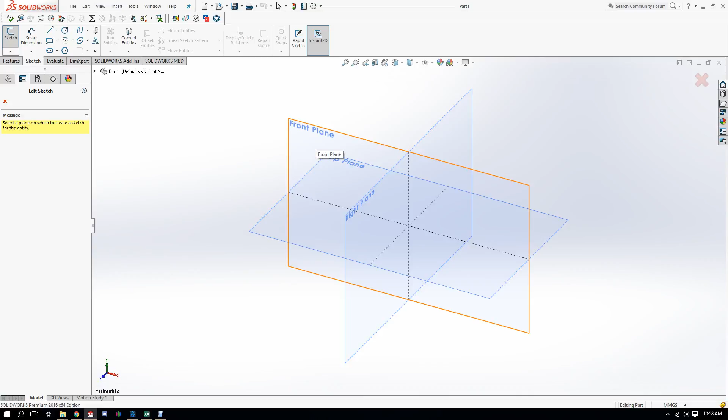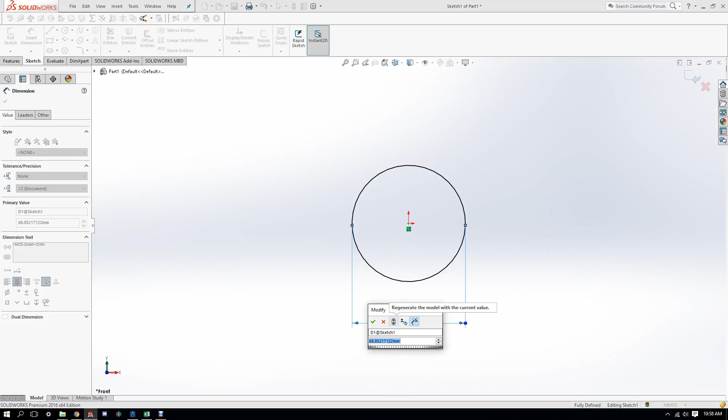We started with a two-dimensional sketch, starting at the origin. It makes a circle, right? It's just a two-dimensional circle. But I'm gonna make it a certain size. This circle is going to be 42 millimeters. So now I have a 42 millimeter circle.

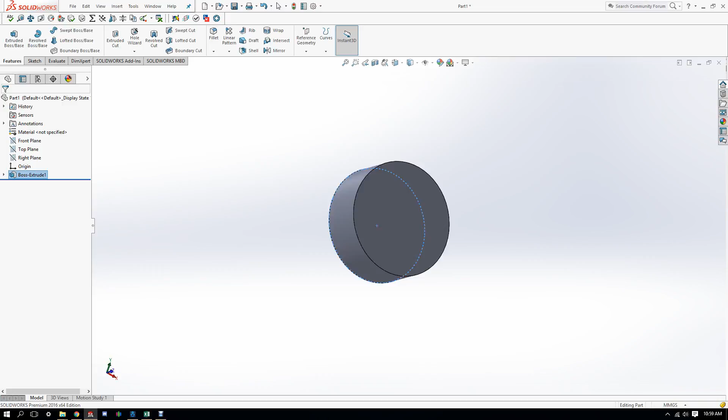But it's still two-dimensional, so I come over here and extrude it. I want it to be 17 millimeters deep. There. Now I have a cylinder boss.

I'm going to go over the back. I'm going to pick a surface to draw on, so to speak. And I make a center line that goes right through the middle. And then I'm going to create a little notch.

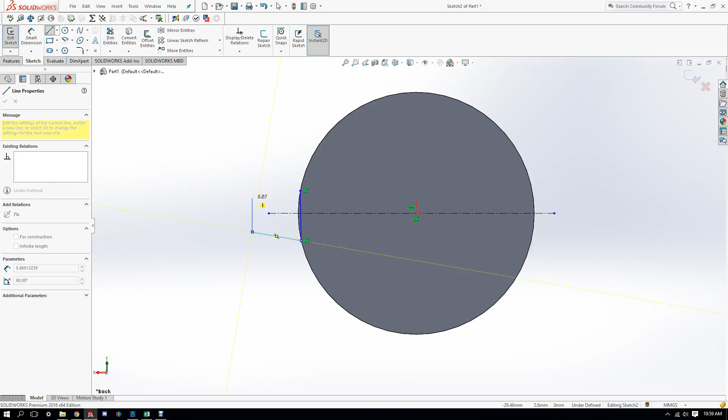Now I want this to be centered on the center line, so I'm going to put this line's center point and the center line that I created, and I'm going to tell it to be coincident. And then I'm going to tell these two lines to be at a certain angle.

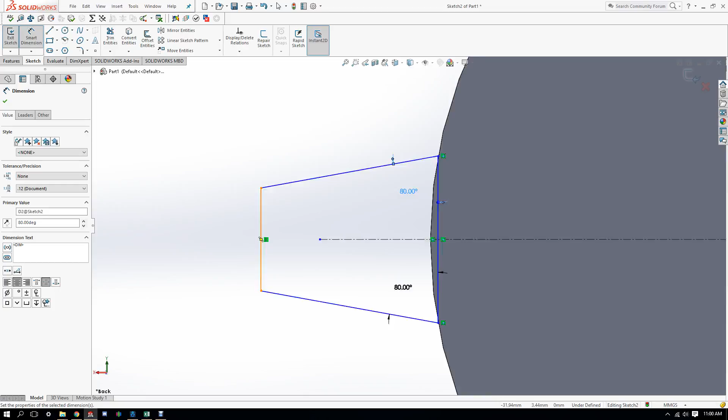80 degrees. And I'm going to probably make this line a little bit bigger.

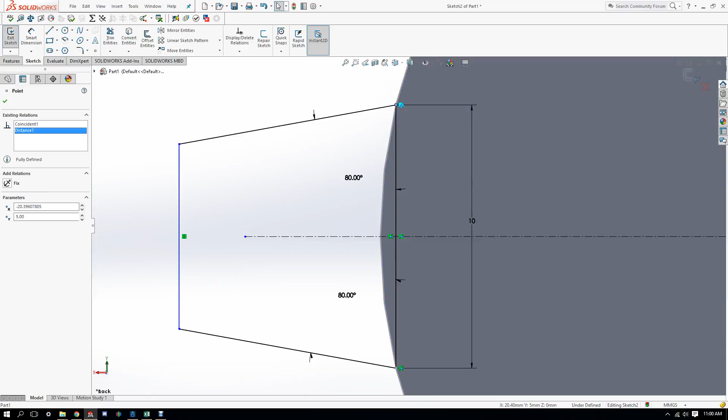When I created this line, I actually hugged the outline, so now this point right here is always going to be coincident with that, with the circumference of the circle. So no matter what I do to this line, it's going to be constrained, and always keep those 80 degrees.

These black lines mean that they've been defined by the sketch. So now I'm going to fillet it. 2mm fillet. Let's try 4 millimeters. There we go.

That's pretty good. Actually, I'm gonna... there we go. Now I'm gonna fillet.

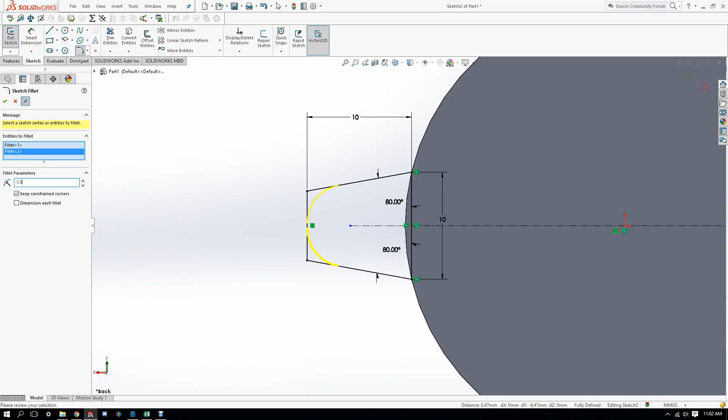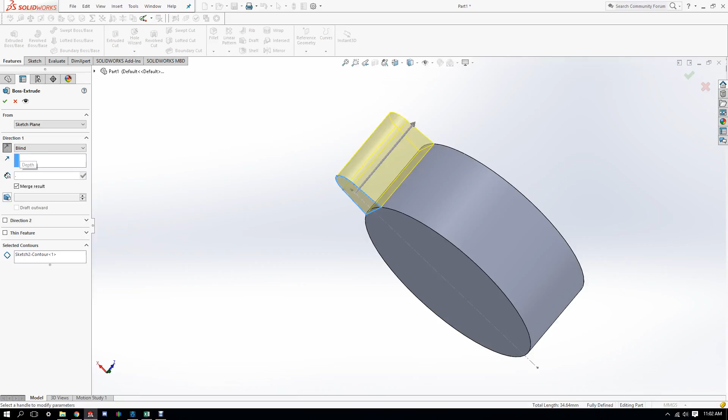There, so I have a new sketch there. I'm going to extrude that one as well, in the opposite direction. And then I'm just going to make that 5 millimeters... 0.85 millimeters.

Now I want this feature to be on the other side of the motor, so I'm just going to tell it to circular pattern, 180 degrees along this line.

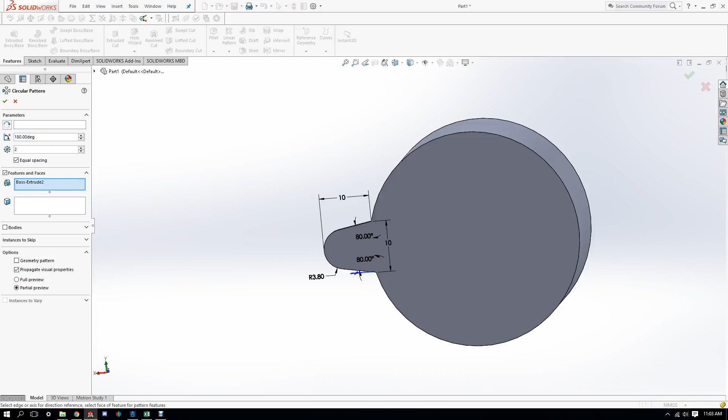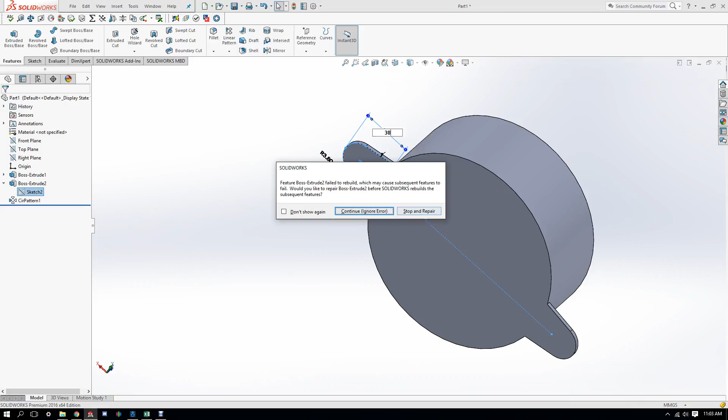There. Now, being parametric, we can change any of the parameters. It won't let me do that. Well, that's because I messed up the fillet.

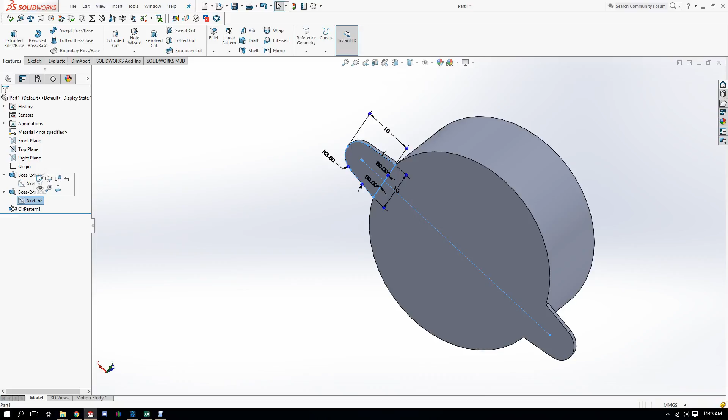You can change any parameter, and it's reflected in the final rebuild.

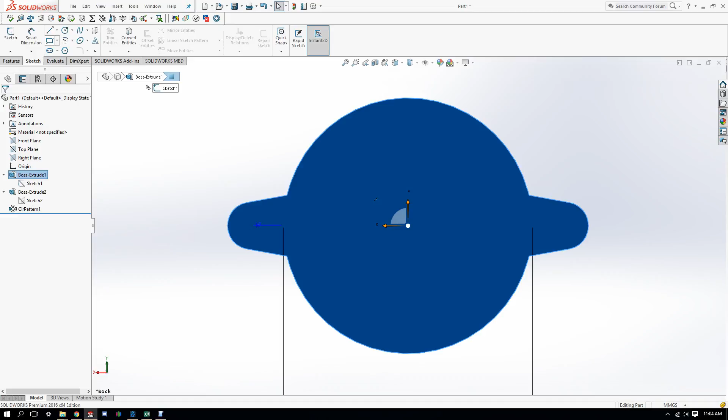Then I'm going to go back to the back. I'm going to make a new center line on this sketch, and I want this line to be centered against the origin. Get really close, so I choose the origin and the center of that line, and I tell it to be coincident.

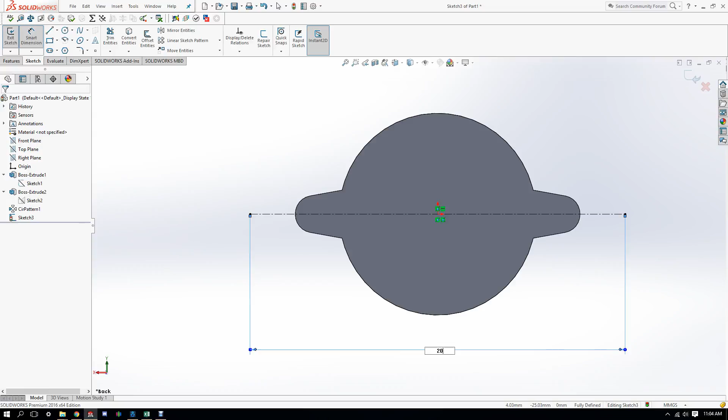Now, no matter how big that line, it could be 80 millimeters, or it could be 20, it's always going to be centered, because both the origin of that circle and the center line middle are

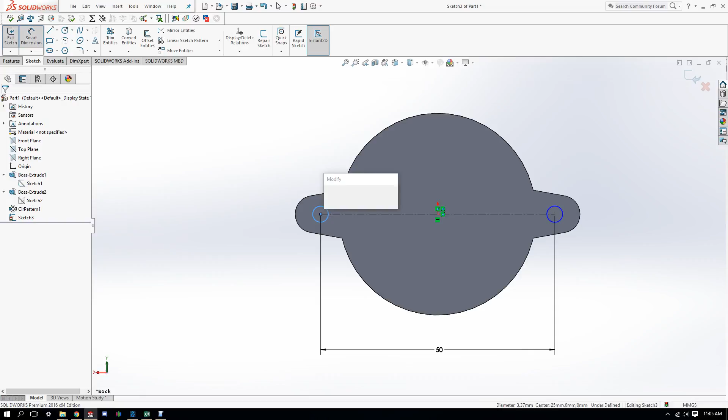coincident on each other. But I actually want these to be 50 millimeters apart, because I'm going to use them as a basis of two new sketches. I'm going to put M3 bolts through this, so I'm going to make smart dimensions. I'm going to dimension these circles to be 3 millimeters.

Again, they're just sketches on the surface, so now I can actually pick that sketch that I just made and cut it.

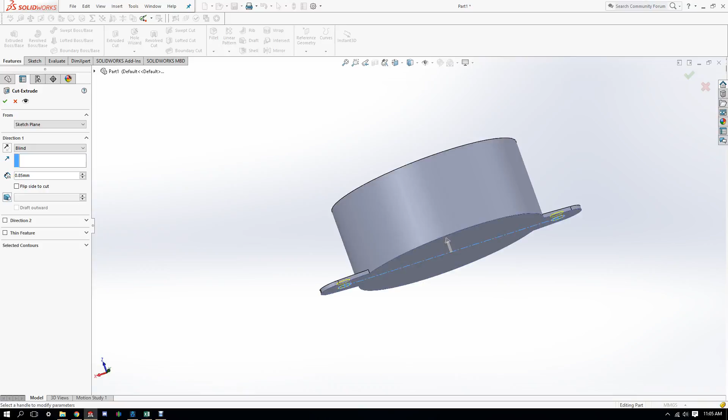And I can always go back here. Because that cut was only just as thick as this line, but I could tell that cut to go all the way, for example. Edit the feature. I can say I want it to be through all.

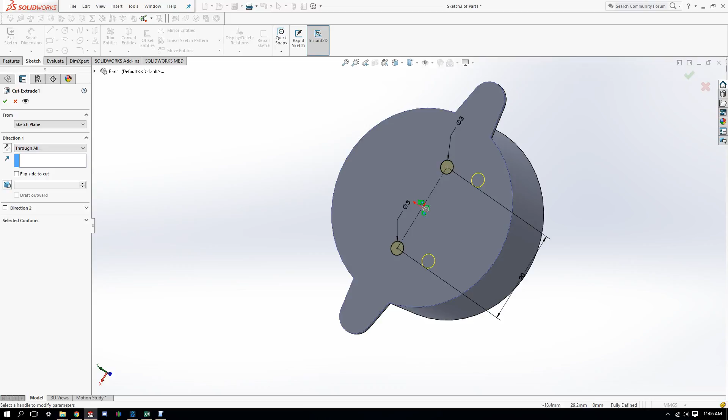But of course, that's not my design, so I'm going to come back here and make this 50. Excellent.

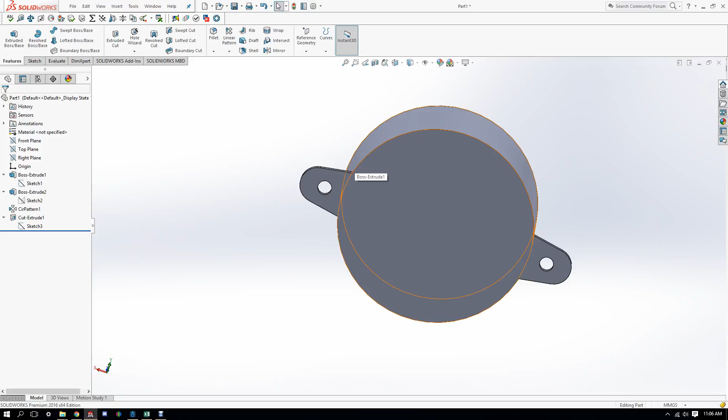I'm actually designing something that exists, because I'm making this motor part of an assembly for a bigger item that I'm making. So I'm going to go back to my

ISO view. Coming to the circle, I'm going to make a new sketch, new center line, starting in the origin. Just make a sketch. I want this to be 10 millimeters from the center.

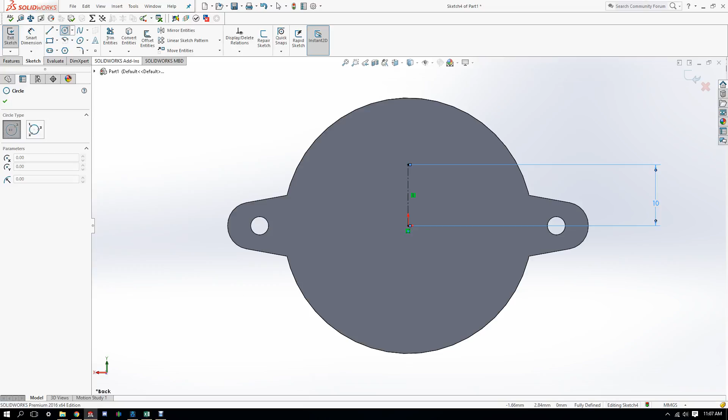And then I'm going to make a new sketch right here. I want to extrude that by, what was it? That should be 0.85 millimeters.

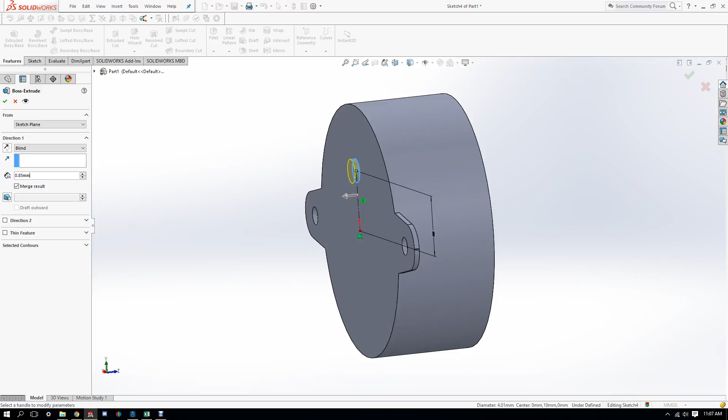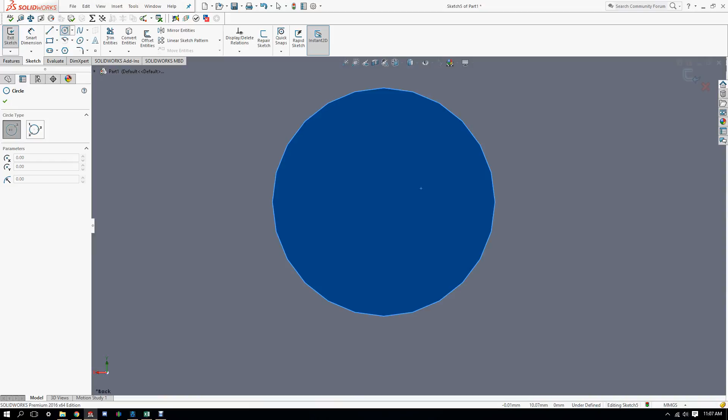And then this one, I'm going to make a new extrusion. Just make that 4 millimeters. Actually, that's incorrect.

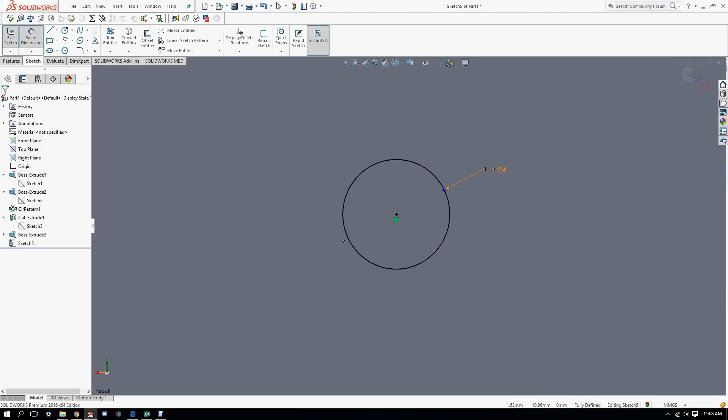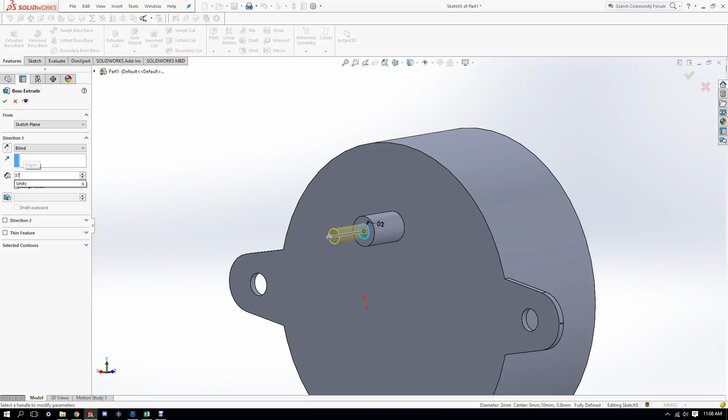There, you have my motor that I'm ready to make into an assembly with my gear. So I'm going to save this.

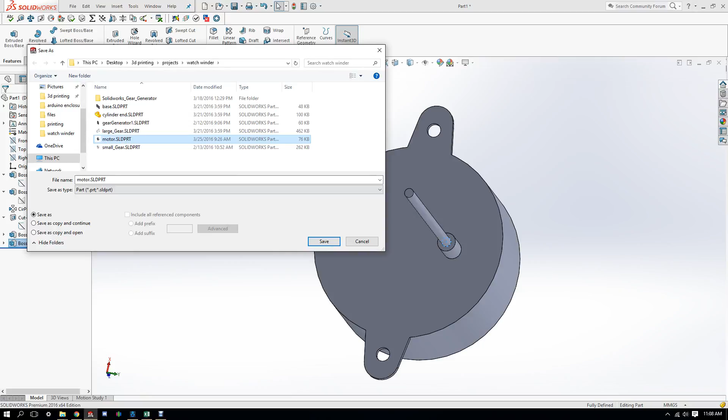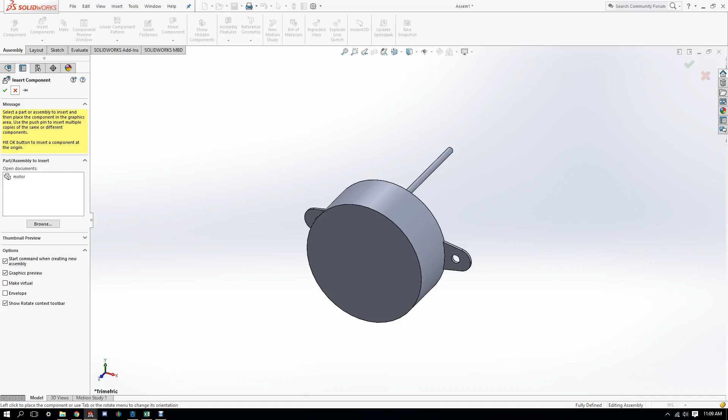And I'm actually going to make an assembly from this part. I'm going to insert the gear that I already made the other day. Just put it anywhere.

And then I'm going to mate these two components. I'm going to say that this shaft is concentric with this inner surface.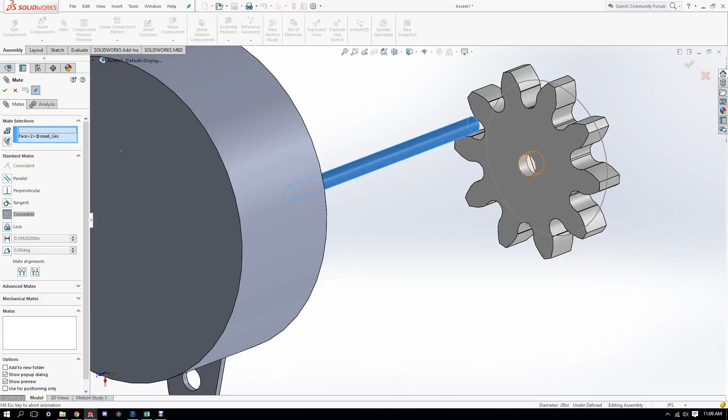Automatically picks the concentric mating. And then I want... I would accept that. And then I want this face to be parallel to this face.

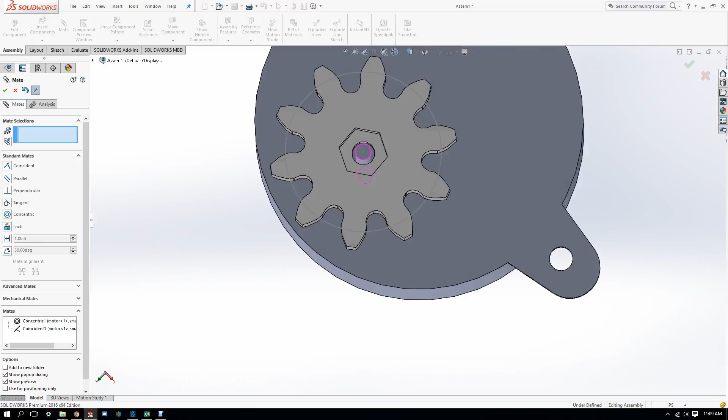All I have to do is add my M3 nut in there, but I have my subassembly.

It's hard to show. I don't know if I can actually put this on the video to show kind of like what this looks like.

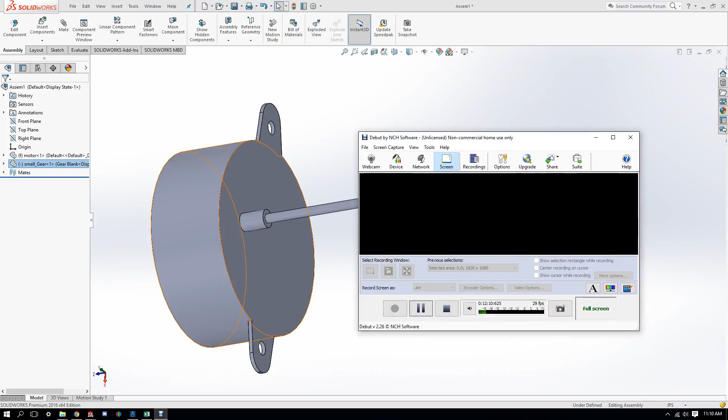Maybe if I open Skype.

So there's a little video preview thing here.

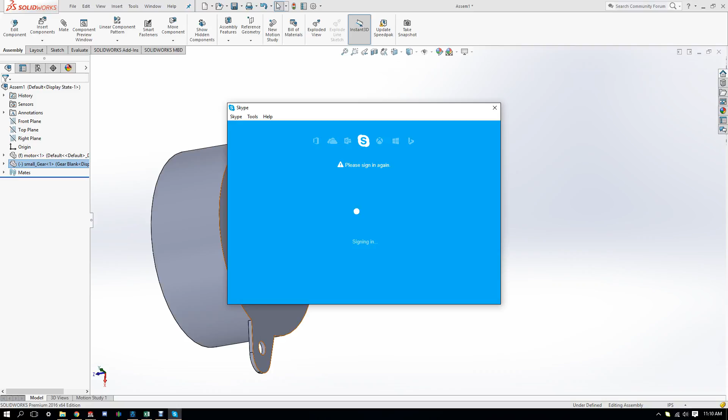Oh, Microsoft, you suck, man.

There. So I can put this in my big assembly.

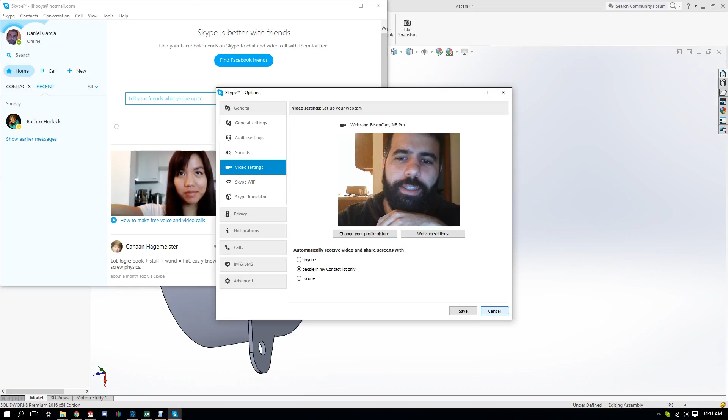I don't know how other pieces of software work, but SolidWorks is, for lack of a better term, pretty solid.

Hope you enjoyed this little demo. I'll be making more SolidWorks videos as I get better with the software.